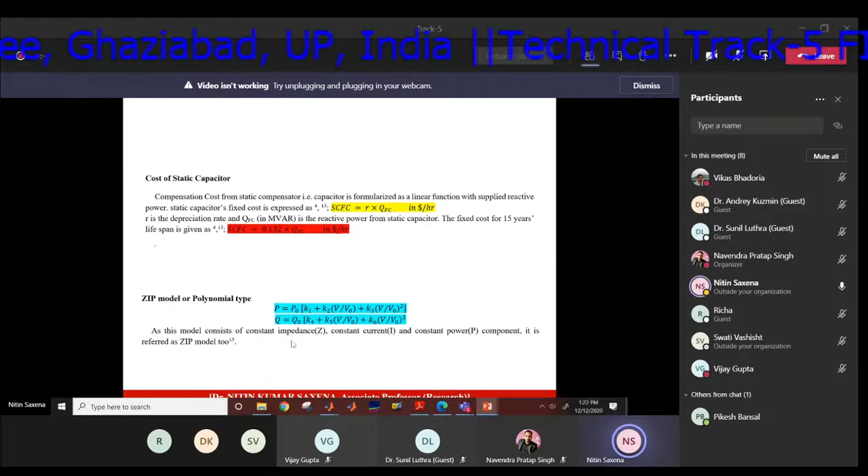As we know, loads may be classified in different categories, and one of the most commonly used methods is the ZIP model. Mathematically, the ZIP model is represented by these blue highlighted equations for real power as well as reactive power. By putting different values of K1, K2, K3, and similarly K4, K5, K6, we can get different classifications of our load model.

Though the polynomial is not so popular, for a realistic approach, if we use the exponential method type of load, it may give a more realistic picture about our load.

So if we put our load in the exponential form as given here, and change the exponential component by putting different values of NP and NQ, we can get different classifications of the load. For this purpose, I used five kinds of load components: the air conditioner, resistance heater, lighting, pump, and large industrial motor. For these, I got the values of NP and NQ from literature.

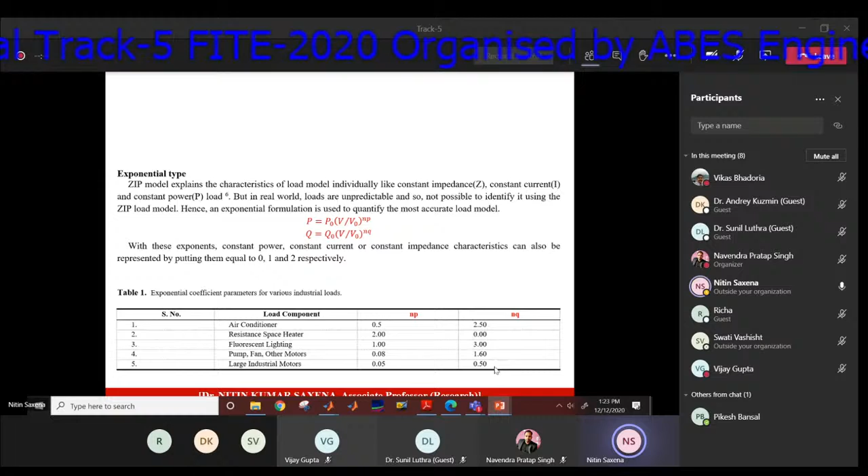However, if we put the value of NP and NQ as 0, 1, 2, then we can again get values like constant Z, I, or P kind of model.

This is the simple model which I use to get the reactive power for our system, in which I use an induction machine. Since I want to use it as a generator, I calculated the torque required for this machine and gave a negative value of torque by which this machine works as a generator. For this, I'm putting a load from the Simulink model, three-phase dynamic load.

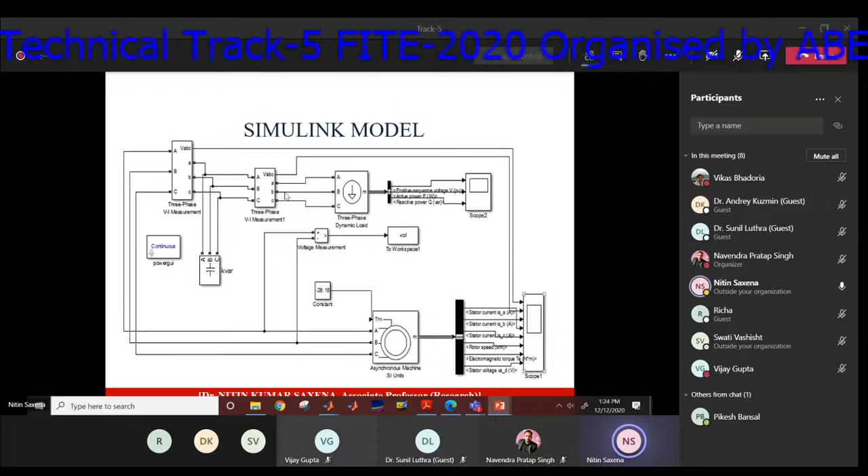There is an option for changing the value of NP and NQ. When I change these values, it will behave like different loads as per our requirement for this paper. This is the capacitor bank, so we can give different reactive power, and the system will work. So how do we proceed?

For proceeding, I used a machine of 4 kilowatt, 400 volt, 50 hertz squirrel cage machine, and I operated it at 4% negative slip so that it can work as a generator.

First of all, I put an iterative M-code MATLAB program, through which I tried to get the torque for which this machine will work at exactly 4% negative slip, along with reactive power estimation. This I calculated for different classifications of the load.

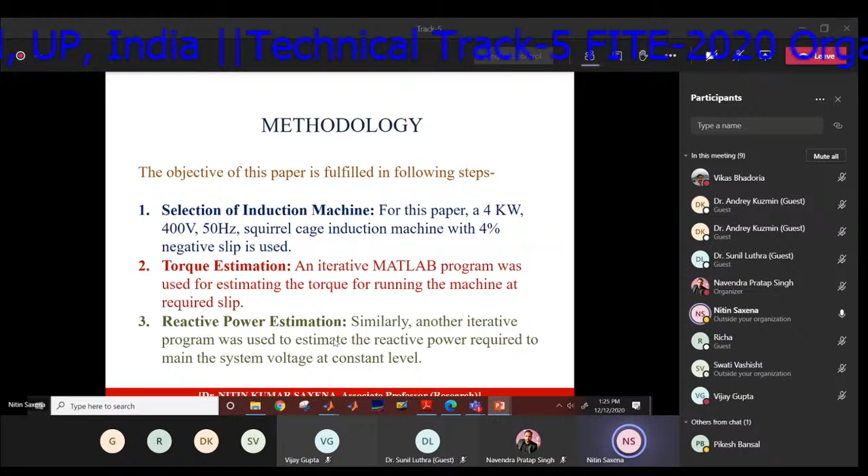So for different loads, the reactive power estimation will be different. From my MATLAB programming, I received different values of reactive power according to the load.

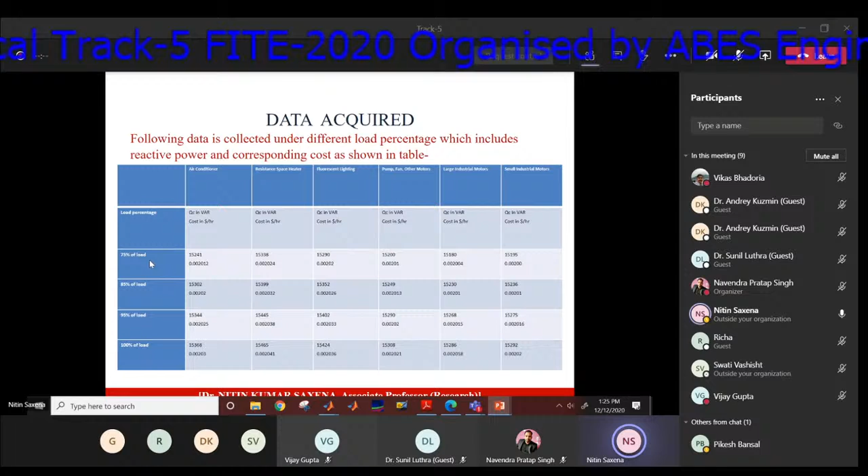For getting different results, I put some mathematics here: when we put the load at 75%, 85%, 95%, or 100%, with different kinds of loads like air conditioner and so on, I got the value of reactive power in each case. Once I got the reactive power, I also mathematically calculated the reactive power cost.

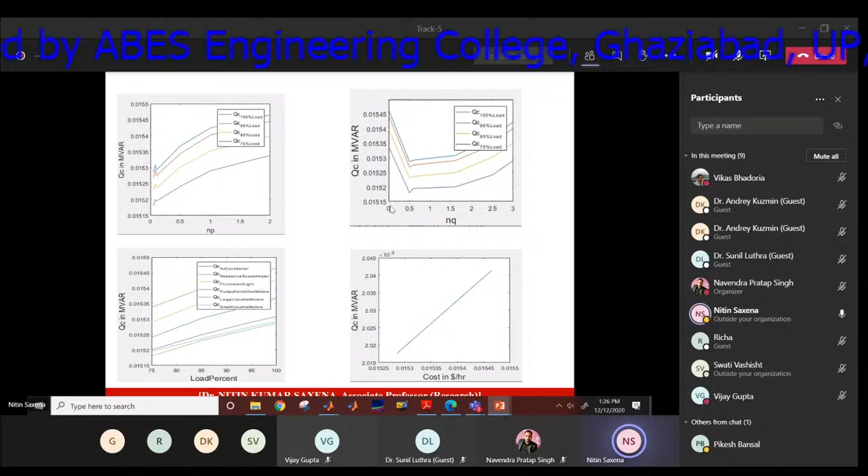This is the graph with values calculated using the MATLAB coding mentioned in the methodology. I tried to get these plots, and from these graphs we can conclude how the reactive power requirement is changing for different loads.

So we can conclude that estimation of reactive power for excitation of self-excited induction generator, or squirrel cage induction generator, has been done using the exponential load model for different types of commercial loads, along with the calculation of cost in each case.

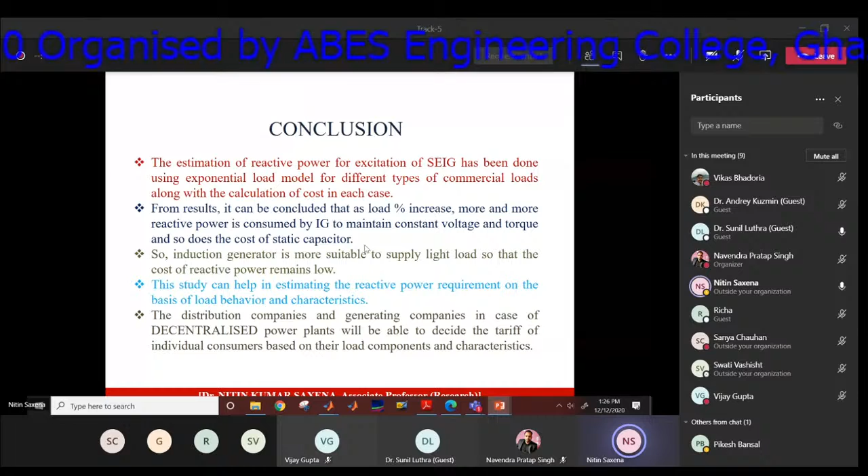From these results, it can also be concluded that as the load percentage increases, more reactive power is consumed by the induction generator to maintain constant voltage and torque, and so does the cost of the static capacitor. So the induction generator is more suitable to supply light load so that the cost of reactive power remains low.

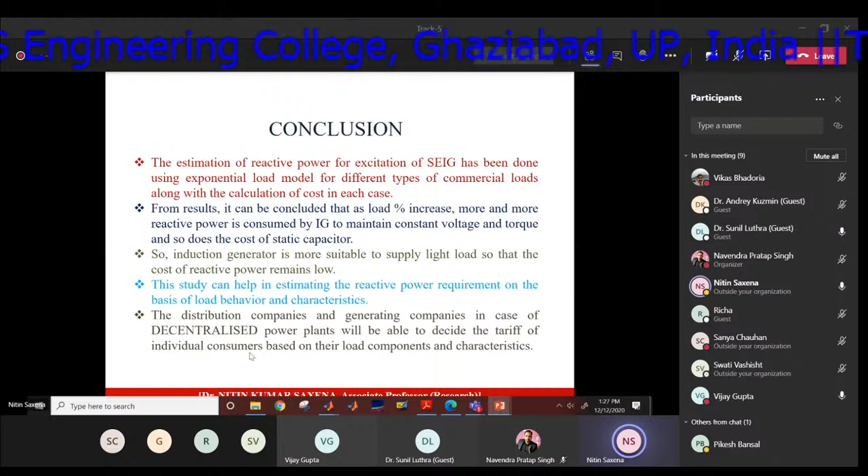This study can help in estimating the reactive power requirement on the basis of load behavior and characteristics. Distribution companies and generating companies, in case of decentralized power plants, will be able to decide the tariff of individual consumers based on their load components and characteristics.

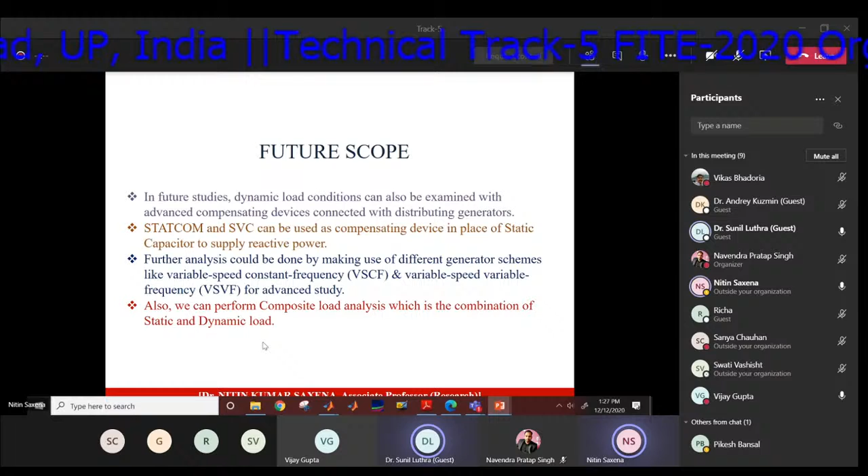In future studies, dynamic load conditions can also be examined with advanced compensating devices connected with distributing generators. STATCOM and SVC can be used as compensating devices in place of a static capacitor to supply reactive power. Further analysis could be done using different generator schemes like VSCF or VSVF for advanced studies. We can also perform composite load analysis, combining static and dynamic loads.

Thank you very much. This is all about the presentation on my topic.

Okay, that's great, Professor Nitin.

Nitin, I have two queries. First, whenever we do research, there is always comparison with previous research. Someone did that work, and we performed ours. From that, we can conclude whether our research is somewhat better, differentiating, or similar. Have you made any comparison with previous results?

Actually sir, in this model I tried to get the iterative procedure for getting the reactive power requirement on the basis of the load. So if I talk about this particular paper, I didn't compare with previous studies. However, I have done that part in my other papers, sir. I have already extended it in that direction for the journal, but in this paper I am not quoting that part. I understand that further extension is always required before sending to journals.

And secondly, I just want to check—there are always some implications of research. Whatever you do, there are always some implications, and that was missing in your presentation. Can you explain?

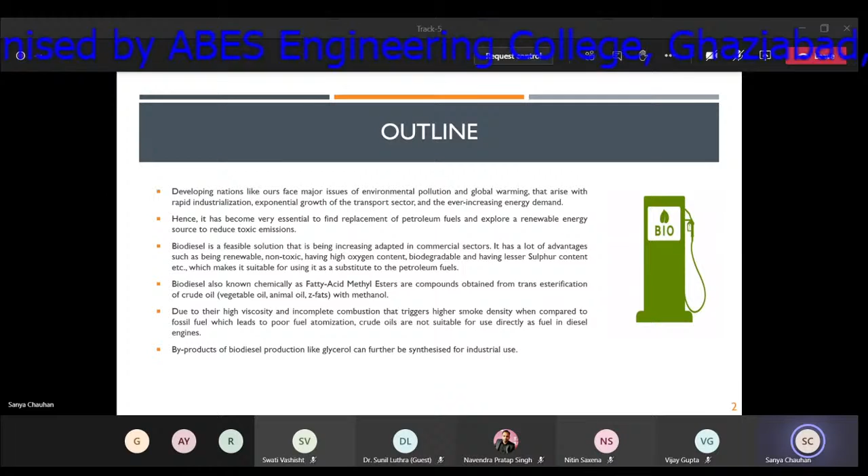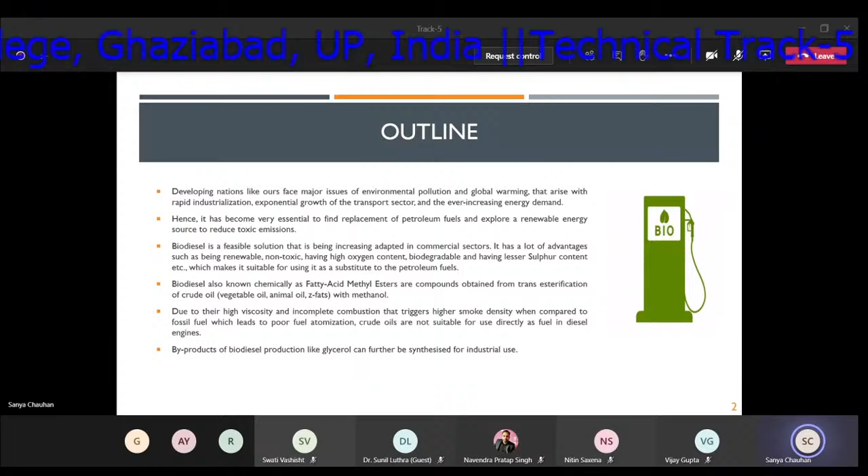Biodiesels, also chemically known as fatty acid methyl esters, are produced by chemically combining any natural oil or fat with methanol or ethanol by transesterification. Due to high viscosity and incomplete combustion that triggers higher smoke density compared to fossil fuels, leading to poor fuel atomization, crude oils are not suitable for direct use in diesel engines. Hence transesterification, thereby reducing viscosity, is necessary. The byproducts of biodiesel production, like glycerol, find extensive use in industrial applications.

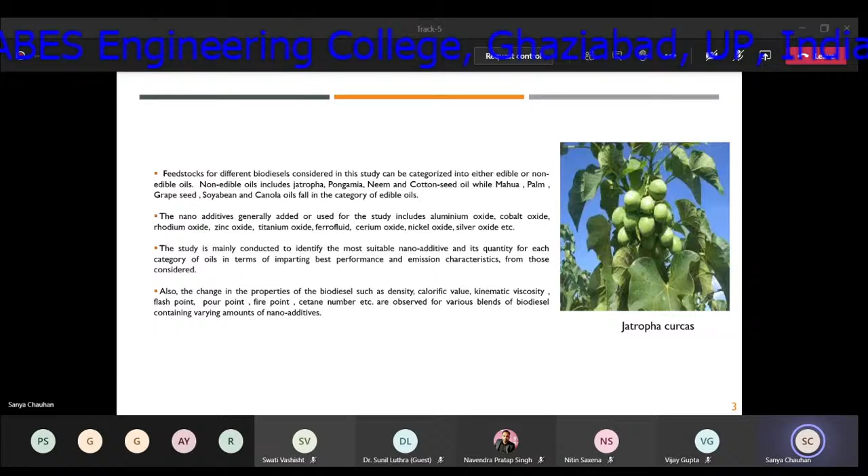The feedstocks for various biodiesels can be classified as either edible or non-edible oils. In these studies, oils from both categories have been considered. There have been nine oils that we considered for this.

Metal-based nano additives are generally added for fuel performance enhancement, and some of those considered in this study are aluminium oxide, cobalt oxide, etc. The aim of the study is mainly to identify the most suitable nano additive from those considered, and its quantity for each category of oil, in terms of imparting the best performance and emission characteristics, for further studies to be aimed in this direction for commercial production.

Also, the change of properties in the biodiesel, such as density, calorific value, kinematic viscosity, and so on, are observed for various blends of biodiesels containing varying amounts of nano additives to account for their practical feasibility. This being a literature review article, about 30 papers have been reviewed, but due to format constraints I wasn't able to include all of them.

So what we see here is one nanoadditive for each oil that gave the best outcomes. It can be observed that most of these follow a similar trend, wherein both performance and emission characteristics are improved, with some exceptions.

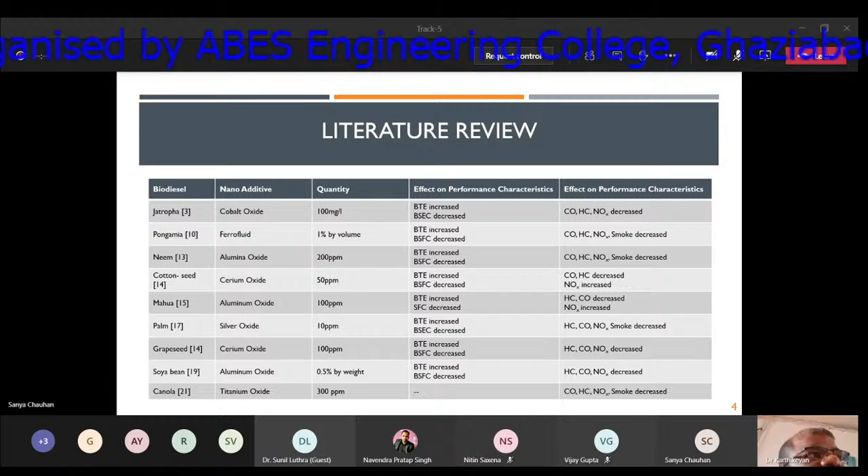Sir, is it audible? Hello? Yes, Dr. Karthikeyan, thank you. Sorry for the delay, sir. It's okay, Miss Sanya Chauhan is just presenting the paper, it is just the second paper of this track. Should we go ahead, sir? From the middle, track 5. Just now I received the message that you can join in track 5. Yes sir, this is track 5, and this is paper number 2 in this track, being presented by Miss Sanya. Should we go ahead, sir? Yes, go ahead. And how many papers are now available? Sir, there are a total of 9 papers to be presented in this track, this is the second one, sir. Okay wait, sir. Okay Miss Sanya, you may go ahead, ma'am.

So as I said, it can be observed that most of these follow a similar trend, wherein performance and emission characteristics were improved. Percentage changes of which have been given on the next slide.

For Jatropha oil, we considered aluminium CNT, cobalt oxide, aluminium oxide, cerium oxide, and graphene oxide nanoadditives. For this biodiesel, cobalt oxide at 100 mg per liter concentration gave the best output. Decreases in various emission and performance characteristics have been observed, like about 2.1% in brake specific energy consumption, and 0.6% in BTE at full load conditions.

1% by volume ferrofluid gave the best output for Pongamia biodiesel, though cerium oxide additives too imparted enhanced thermal efficiency; due to reduced emission characteristics, the decision was made otherwise. Similarly, for neem biodiesel, aluminium oxide was considered. For cottonseed, cerium oxide; aluminium oxide yet again for Mahua biodiesel. For Mahua oil biodiesel with aluminium oxide, though hydrocarbon and CO emissions decreased, a 7.95% increase in NOx emissions was observed.

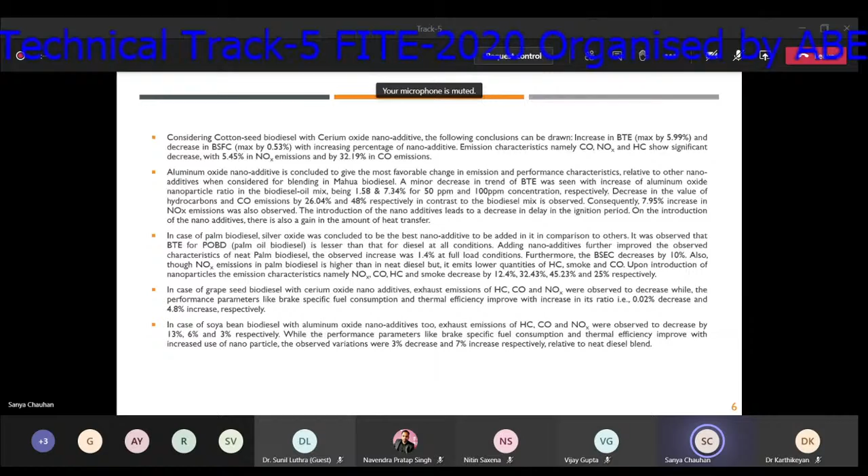For palm oil biodiesel, silver oxide was concluded to be the best. Cerium oxide for grapeseed, and aluminium oxide yet again for soybean biodiesel.

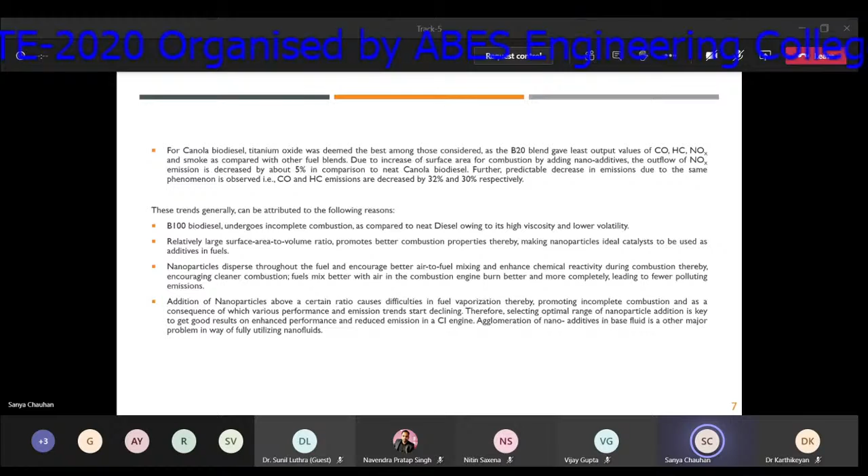The general trends observed can be attributed to some given reasons. Higher viscosity and lower volatility of biodiesel causes it to undergo incomplete combustion, hence performance of the fuel is lower than that of neat diesel. Nanoparticles provide a relatively larger surface area to volume ratio, hence promoting better combustion properties, making them ideal catalysts to be used as additives in fuel. Another reason for the observed trends is that nanoparticles disperse throughout the fuel and encourage a better homogeneous air to fuel mixture.

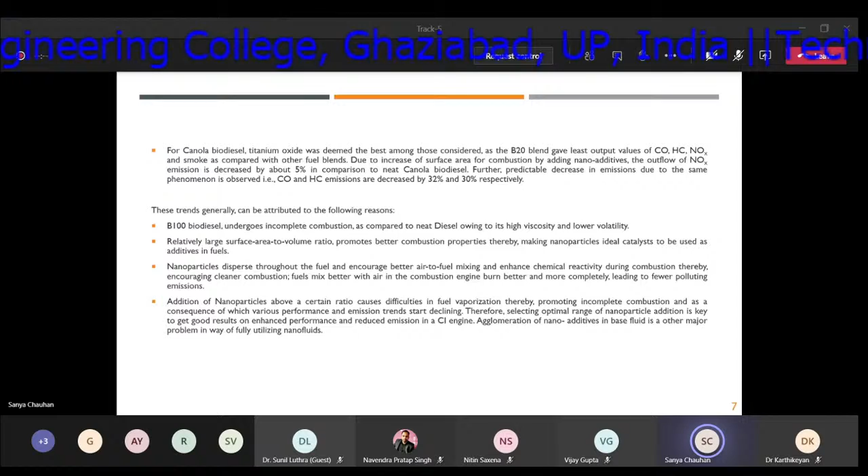Some of the exceptions that can occur, like we observed in the NOx emissions for Mahua biodiesel with aluminium oxide, are because addition of nanoparticles above a certain ratio causes difficulties in fuel vaporization, thereby promoting incomplete combustion. As a consequence, various performance and emission parameters start declining. Therefore, selecting an optimal range for nano additives is key to getting good results. Agglomeration, the clogging of nano additives in base fluid, is yet another major problem in fully utilizing nano additives commercially.

In conclusion, based on the available literature of said oils, B20 blend of Pongamia oil biodiesel blended with 1% by volume ferrofluid gave the most favorable trends in performance and emission characteristics. Further studies can be focused on this combination, to obtain an optimum ratio of nano additive to be blended with the biodiesel, or by varying the compression ratio, etc., to obtain enhanced results.

Some other factors for drawing this conclusion, and to consider Pongamia oil biodiesel as a possible additive to diesel for commercial use, is because Pongamia is a non-edible oil, and the production of biodiesel from edible oils, while a good option, is not commercially feasible. The residual of Pongamia biodiesel production, like the tree barks and leaves, finds widespread use for medicinal purposes.

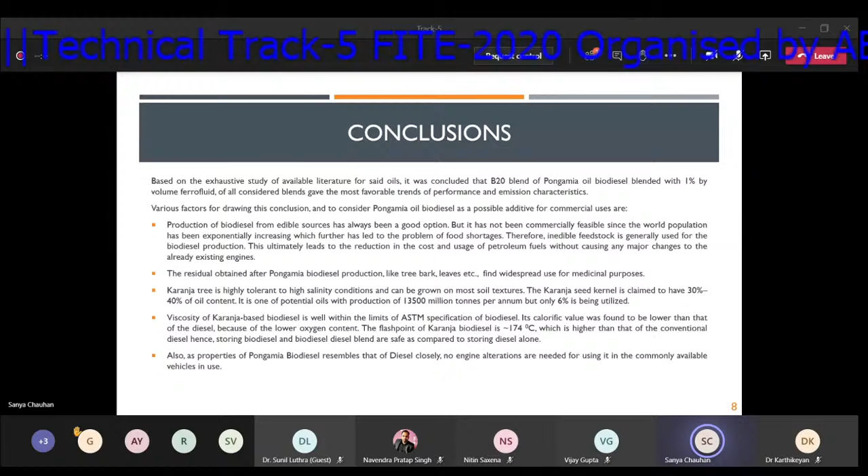That is all, I guess.

Query from Dr. Andrey Kuzmin. Yes, Dr. Andrey, please ask. Yes, I have a question. Could you please tell me what is the error level of your measurement tools and the overall error level of the system? Sorry, I wasn't able to comprehend.

Okay, I have to repeat it. Yes, sir, sorry, I wasn't able to present the question. Do you have any values of the systematic error of your measurement systems? So this is a review paper and not a research paper, so I don't have the error calculations.

This question is concerned with one of your slides where you show that some parameters change very little, around 2%, 5%, 0.6% increase in BTE. But this is a very, very low change, and the measurement tool must be very accurate to capture this. So these values have been taken from other research papers that have been published. Okay, I see. Thank you.

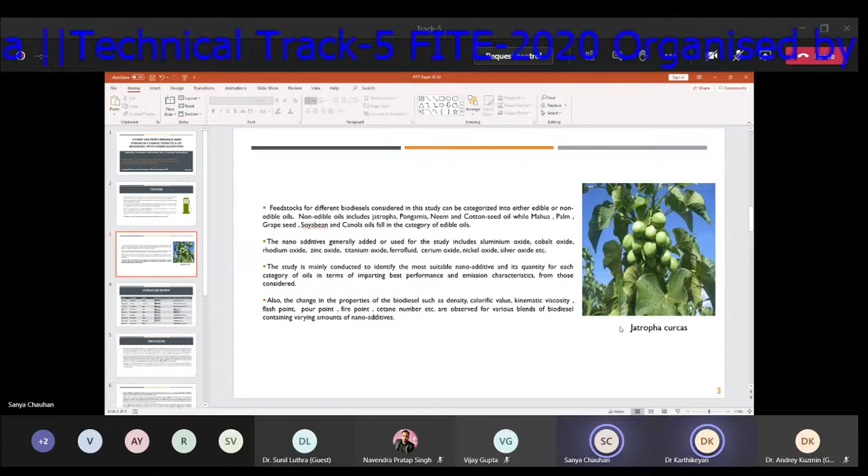Sir, I'm not able to hear you. What? Hello. Hello. Hello, yes sir. Yes. Okay. Hello. Hello, please tell me.

Hello. Yes, sir. Yes, madam. Please tell me why you are taking this now.

The biofuel 4th generation is going on, but you have taken only the 2nd generation. It is an old work now. And what are the nano additives you have taken?

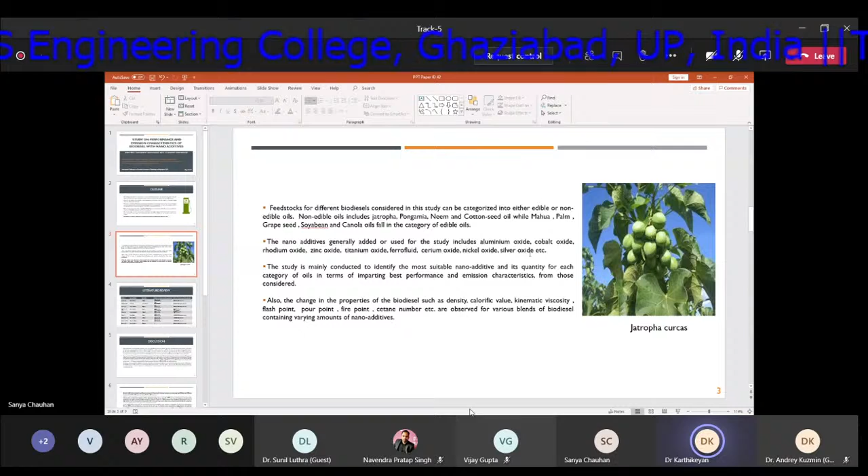So the nano additives, the aluminum oxide, cobalt oxide, basically metal-based nano additives have been used, material based. What is the combustion temperature of the nano additives? Do you know that? Is it after combustion, a complete combustion, or will it maintain inside the combustion chamber? So I guess it's released with the exhaust gases.

No. Try to understand my question. You should know before using nano additives, first we should know the combustion temperature of the nano additives. Because after compression, the combustion temperature is around 1600 degrees centigrade. But our selection of nanoparticle combustion temperature should be less than 1600. Only then it will make complete combustion inside the combustion chamber. Otherwise it is not possible, it will clog everything, nozzle and flow pipe and everything.

Have you found that value of the combustion temperature of the nano additives or not? So this is just a review paper, we've not taken a considered review of that. Okay. Are you a research scholar or ME, Master of Engineering?

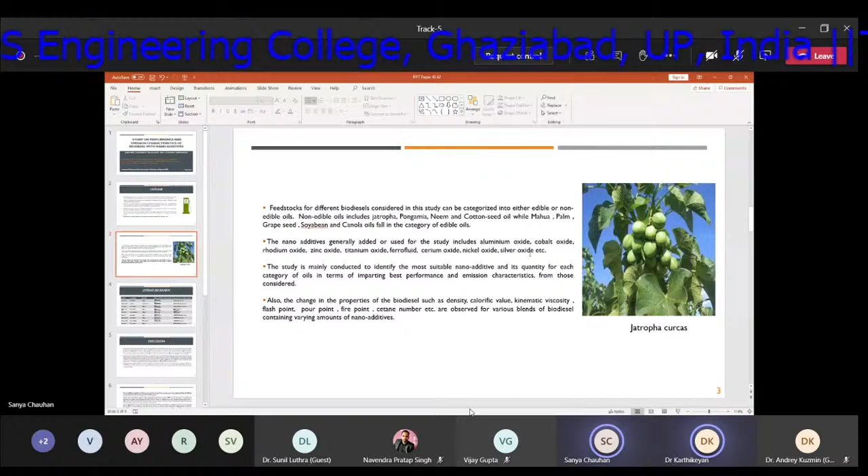It's with BTech students. What BTech? BTech student. Yes sir. Okay, better. I have nearly published around 70 SCI papers in the biofuel area and engine testing. My name is Karthikeyan, you can go through the Google citations and refer more papers.

Do you want any doubt regarding your project? You can contact me, I will help you, don't worry. Okay sir, sure sir, thank you. Don't do that old one.

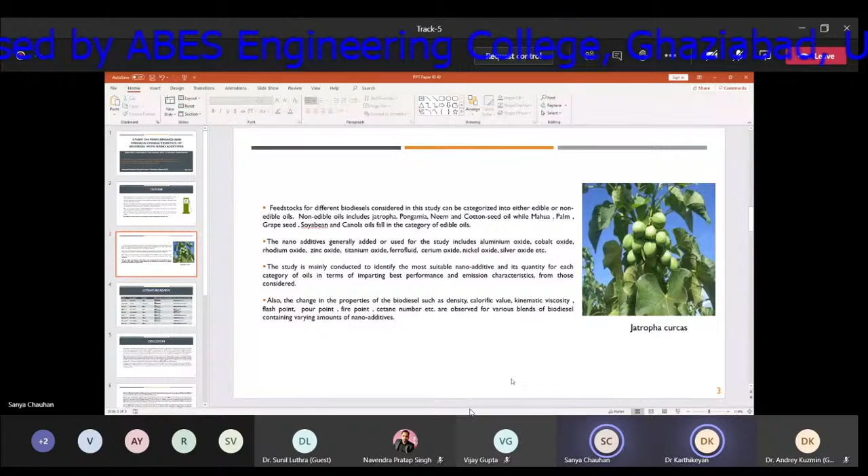You have taken an old one, but now all energy conversion is going towards electric vehicles. It's okay to focus on biofuel, but it should be the latest trend. The most recent trend in biofuel is algae, so algae biofuel is the latest trend going on. If you are doing this project in biofuel, you can take it as third generation, which is better. Third generation means algae, algae means you have to focus only on microalgae.

Okay, but anyway, all the best. Okay, carry on, okay.

Dr. Sanya, I have one query. Whenever we do a literature review, there will always be some review criteria. What was the review criteria? Sorry, what review criteria? For example, what were the keywords? What databases did you search? Just what was your criteria for reviewing these papers? Why only these 25 or 27 papers?

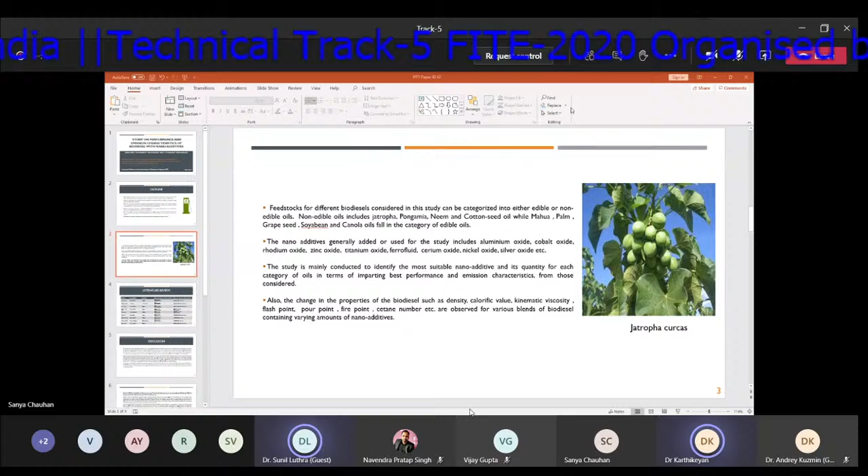Dr. Karthikeyan, please mute your mic. Yes, just muted me, so you can reply. So...

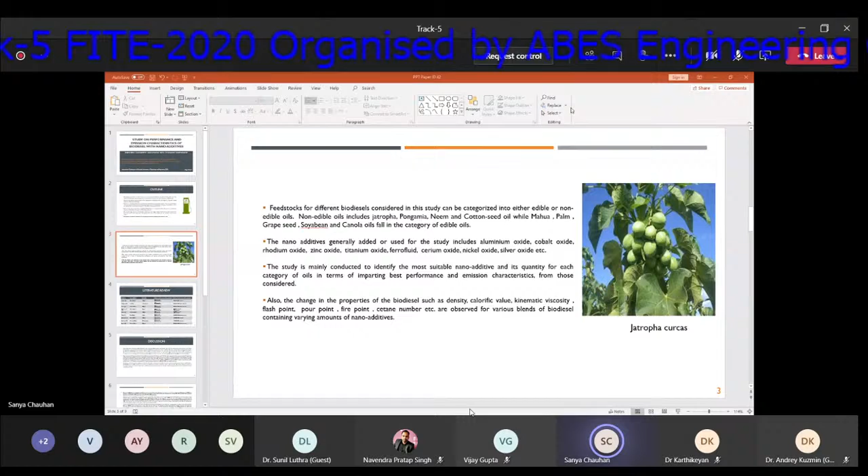We've used the generally used biodiesels that have been studied upon, that are mostly studied upon, and as I said, metal-based nano additives, whatever nano additives we were able to get. Okay, thank you, thank you.

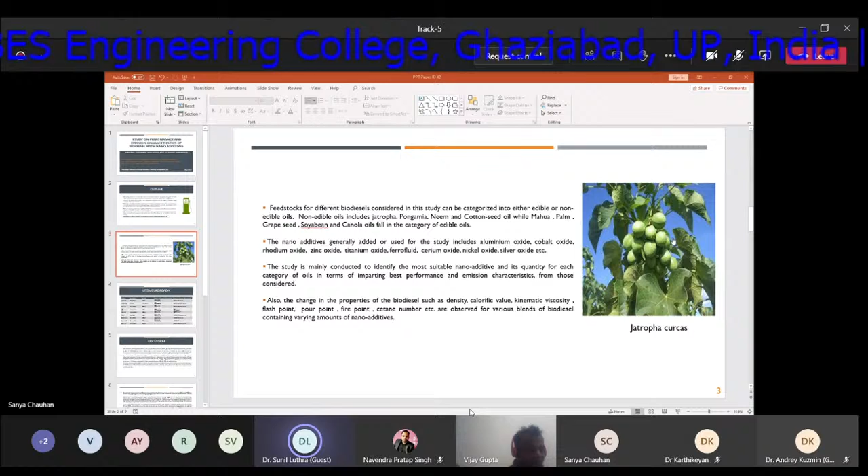Before we proceed for our next presentation, I would like to introduce our co-session chair, Professor Dr. S. Karthikeyan. Dr. Karthikeyan is working as a professor and head of the department of Mechanical Engineering at Syed Ammal Engineering College, Tamil Nadu. He completed his PhD in Mechanical Engineering in 2015, ME in Thermal Engineering in 2007, and BE in Mechanical Engineering in 1995. His area of specialization includes thermal engineering, solar power technology, internal combustion engine, and biofuels.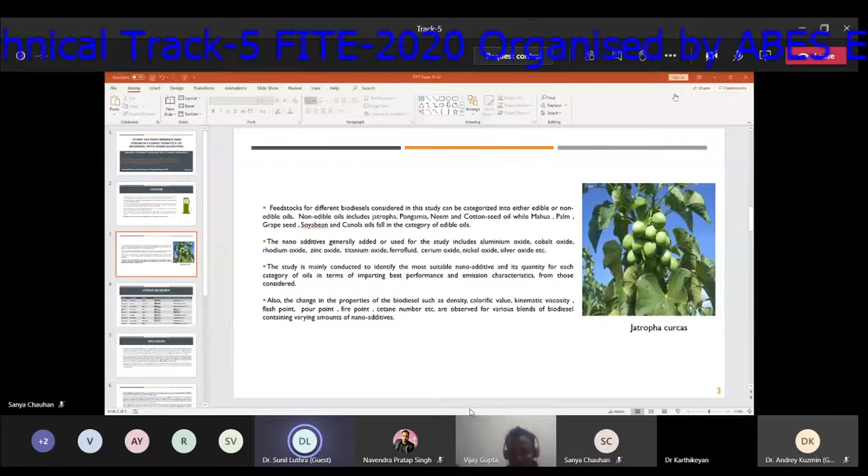Miss Payal Sharma. Okay sir, okay sir, yes sir, I'm sharing. Sir, is it visible? Yes ma'am, it is visible. Just make it presentation mode. Okay, am I audible? Yes ma'am, you are audible.

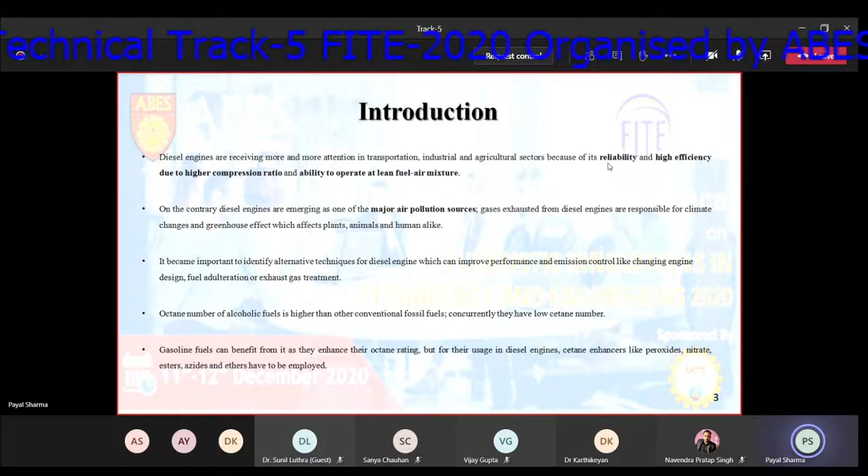So the basic introduction is that, as we all know, diesel engines are a major air pollution source, producing emissions responsible for climatic changes. We need to focus on reducing emissions and increasing performance. Nowadays, many researchers are focusing their work on alternative fuels, as well as on adding nano additives and alcoholic blends or biodiesel blends with diesel to improve performance and reduce emissions.

So I have focused my review on the alcoholic additives that are being used for diesel to reduce emission as well as to improve performance.

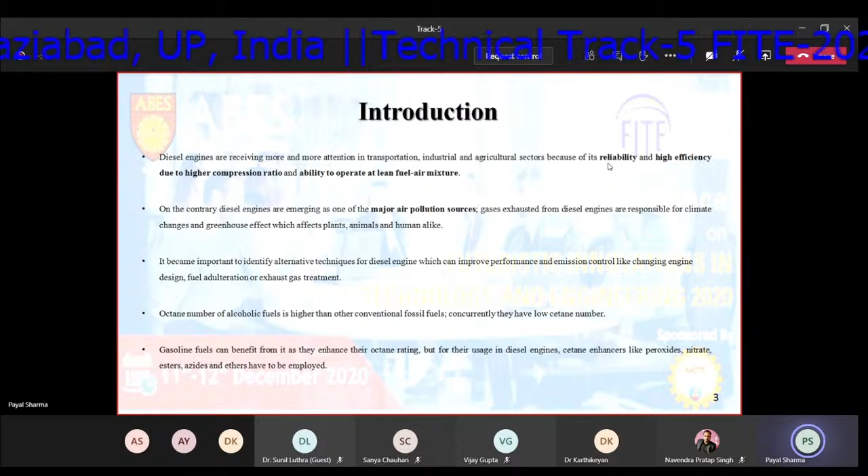Through my research, I've seen that alcoholic fuels have a high octane number but a low cetane number. For gasoline fuels this is good because it enhances the octane rating, but for diesel fuels it reduces the cetane rating. So we have to use cetane enhancers with diesel like peroxides, nitrates, esters, azides, and ethers.

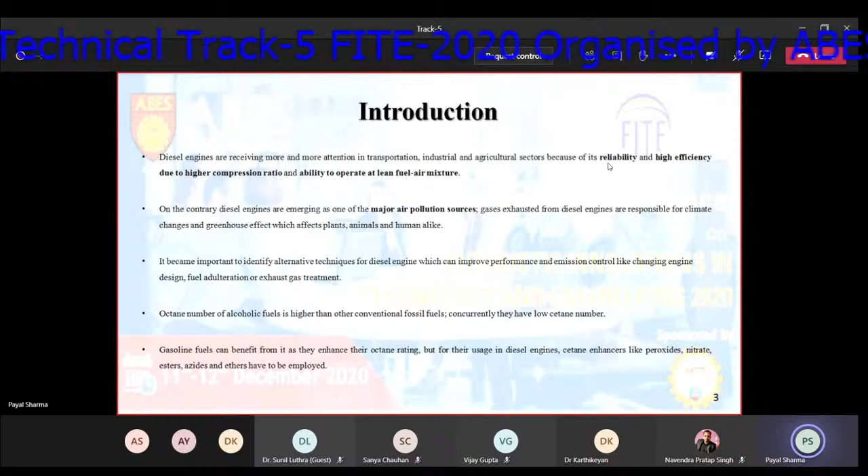If we use cetane enhancers along with alcoholic fuels, these cetane enhancers also produce some effects on emissions. So basically it has to be a compromise of how much to be added.

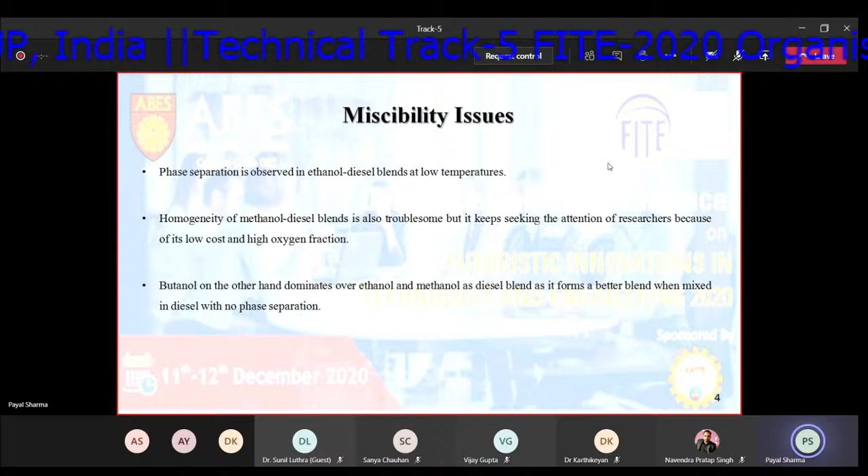Miscibility issues usually come when we add alcoholic additives with diesel, like phase separation observed with primary alcohols. When we blend ethanol or methanol with diesel at low temperature, we usually observe phase separation. Homogeneity is also an issue, so it's troublesome, and we have to look for what else can be added to improve the homogeneity of ethanol and methanol with diesel blends, that is with primary alcohols.

However, among all the alcohols, butanol has some superior properties. It dominates over ethanol and methanol as a diesel blend because it forms a better blend even at low temperatures, and no phase separation is observed.

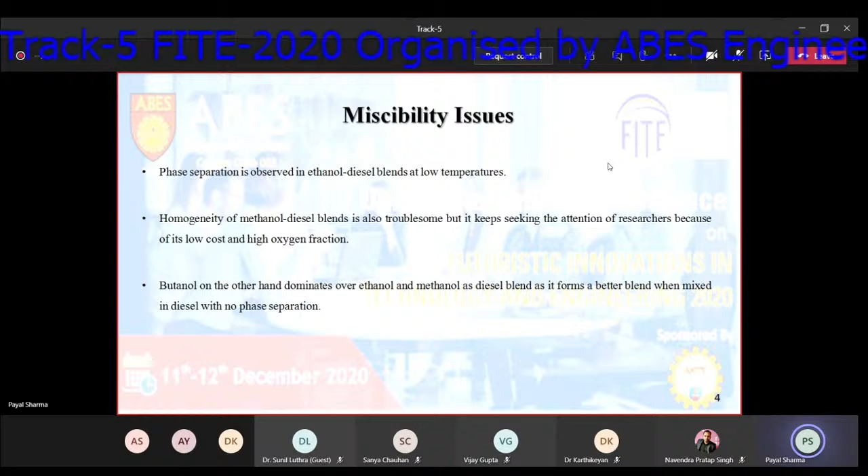The cetane number basically is a specification that indicates the self-ignitability of the fuel, and the cetane number of butanol is high compared to the primary alcohols. The cetane number of primary alcohols is already low, and although butanol also decreases the cetane number of the diesel blend, amongst the primary alcohols, the cetane number of butanol is high.

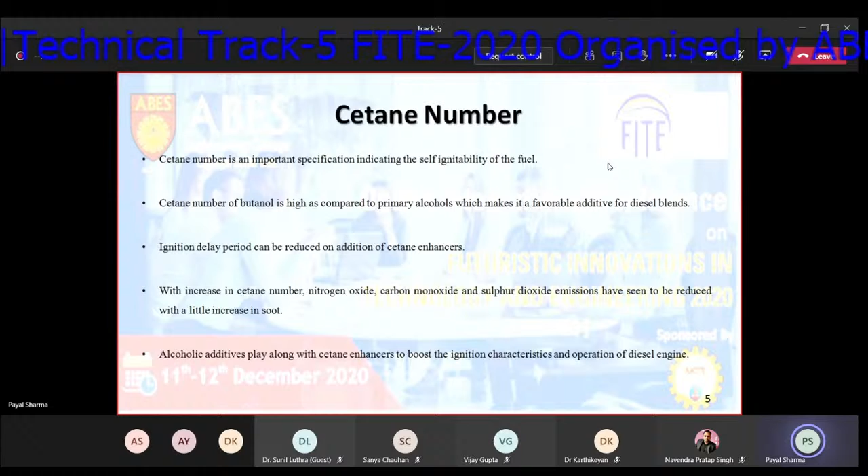So amongst all the alcohols, butanol is a better additive option for diesel because no phase separation occurs even at low temperatures, and the cetane number is also high compared to the primary alcohols. Although the ignition delay period can be reduced with the addition of cetane enhancers, we have to add a cetane enhancer when we add alcohol to diesel.

That is because cetane number will be reduced, so we have to add the cetane enhancer. Cetane enhancer also reduces the ignition delay period, so it helps in that. As we keep increasing the cetane number, the NOx, carbon monoxide, and sulfur dioxide emissions are seen to be reduced, with a little increase in soot though.

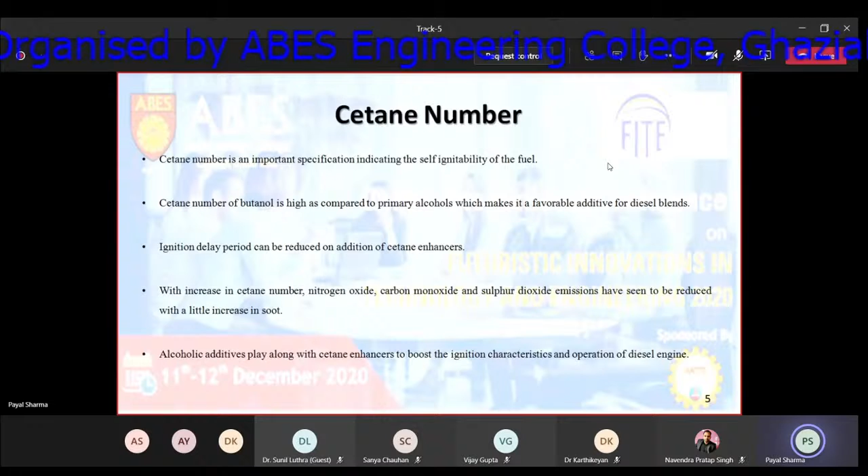So alcoholic additives basically play along with the cetane enhancers so as to boost the ignition characteristics. If we need to add alcoholic additive with diesel, we have to add cetane enhancers, although butanol has superior property amongst all the alcohols. But even then, if we need to add alcohol with diesel blend, we have to add cetane enhancer.

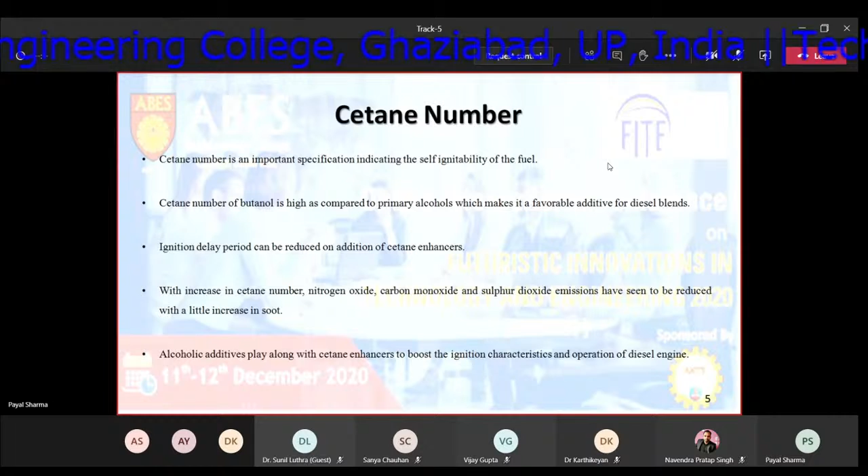There is limited solubility in diesel, but we can improve those blends by adding certain additives, emulsifiers, or cetane enhancers. Higher alcohols have better solubility with diesel compared to primary alcohols, and they also form stable blends at low temperature, whereas methanol and ethanol cannot form stable blends at low temperature, even though we can improve that by adding certain emulsifiers.

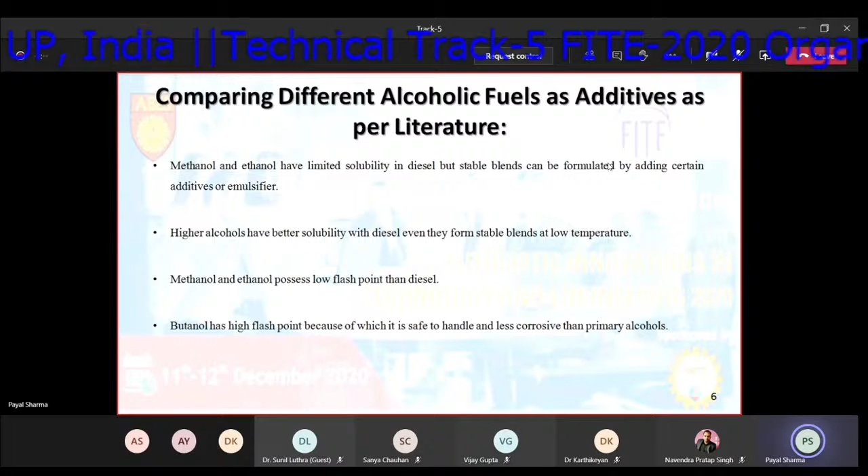Methanol and ethanol possess low flash point also compared to diesel, which is a barrier in terms of safety. Butanol has a high flash point amongst the primary alcohols, for which it is safe to handle, and it is also less corrosive than the primary alcohols.

That is why, when I went through many research papers, I've seen that many researchers have used butanol with diesel, and many have also used methanol and ethanol, but then they have used some cetane enhancer or some emulsifier or additive with it.

So I've summarized all the alcoholic fuels like primary and a few secondary ones like higher alcohols. I've been through papers and seen what can be the barrier if we are using alcohol like methanol and ethanol. So I've summarized it in a table.

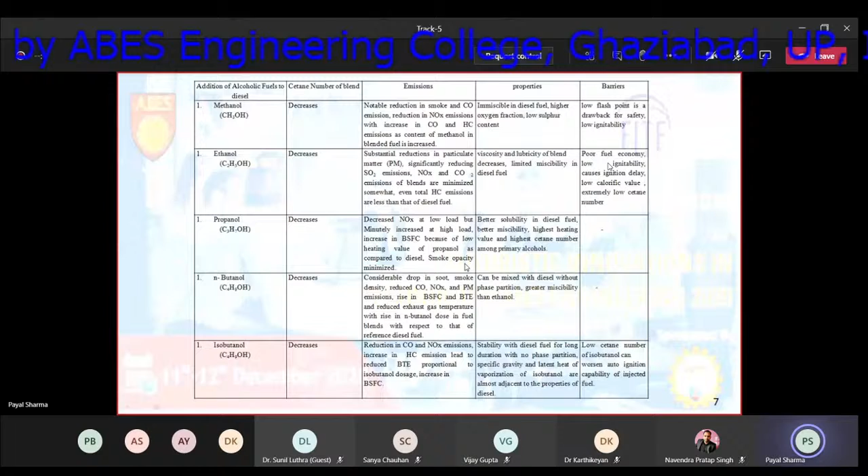Basically, the cetane number of alcoholic fuels is low, so when added to diesel fuel, the cetane number always decreases. I've seen that adding alcoholic additive to diesel always decreases its cetane number, so for that we are adding the cetane enhancer.

As per the emissions, there is a difference: when we add methanol, it gives reduction in smoke and carbon monoxide emission and reduction in NOx emission, but a little bit increase in carbon monoxide and HC emissions. Similarly, with ethanol, we see reductions in particulate matter and sulfur oxide emissions, also NOx and CO emissions were minimized, but total HC emissions were less than that of diesel fuel. So every alcoholic additive has some different effect on emission.

Whereas for the properties also, methanol and ethanol, as we discussed, are immiscible in diesel fuel, so solubility issues are always there with methanol and ethanol. The barriers for using methanol and ethanol are, first of all, low flash point, which is a drawback for safety, poor fuel economy, low ignitability, and low calorific value.

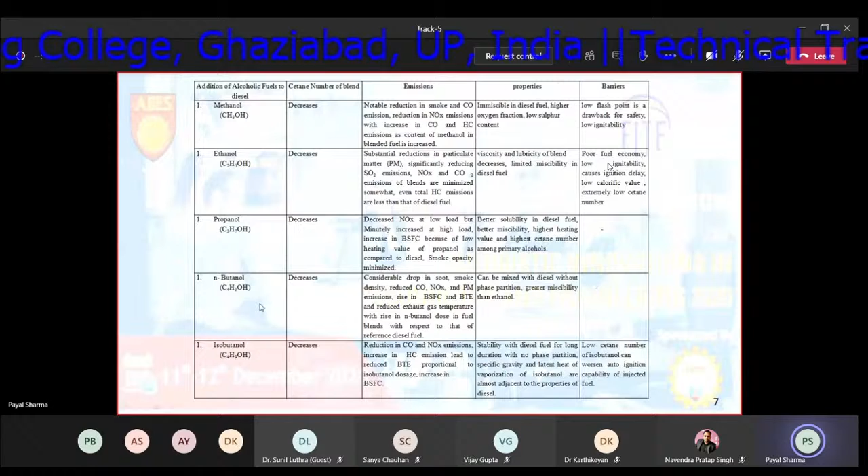With butanol and propanol, I have found limited issues coming up, and even the issues that were coming up are being resolved, so very few barriers for propanol and butanol were there. But for isobutanol, it has low cetane number, so it can worsen the auto ignition capability of the fuel. Reductions were found in every case, but in some cases soot was exceeding. So this is how I have summarized it in a table.

Sorry, my slide is not good. Okay, so what can be the solution for the miscibility issues? I've gone through alcoholic fuel additive papers.

The solution can be, for primary alcohols, many researchers have used biodiesel along with ethanol when mixed in diesel. The biodiesel improves the solubility, but due to its poor cold flow characteristics, at low temperature it poses problems because it increases the viscosity. So biodiesel can be a solution to the problem of solubility of ethanol and diesel, but it also poses problems in cold weather and low temperatures.

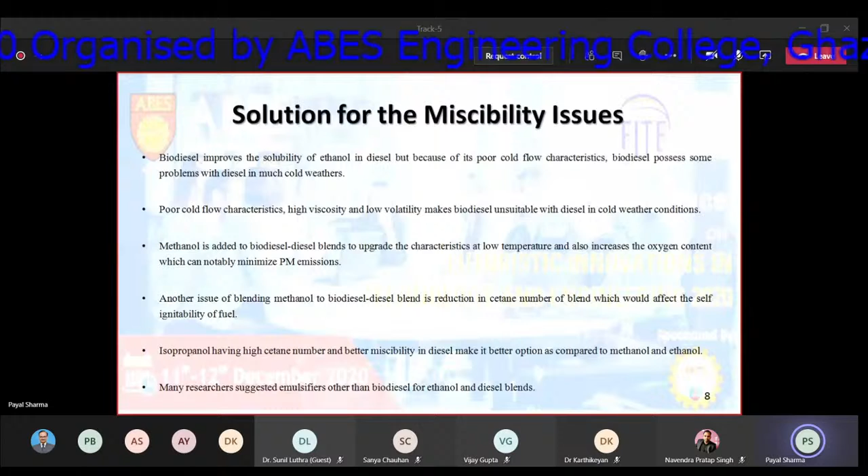Similarly, this poor cold flow characteristic, high viscosity, low volatility, makes biodiesel unsuitable with diesel in cold weather conditions. Otherwise, it's okay to improve the solubility of ethanol and diesel. Similarly, methanol can also be added to biodiesel diesel blend. It upgrades the characteristics at low temperature, increases the oxygen content, and minimizes the particulate matter emissions.

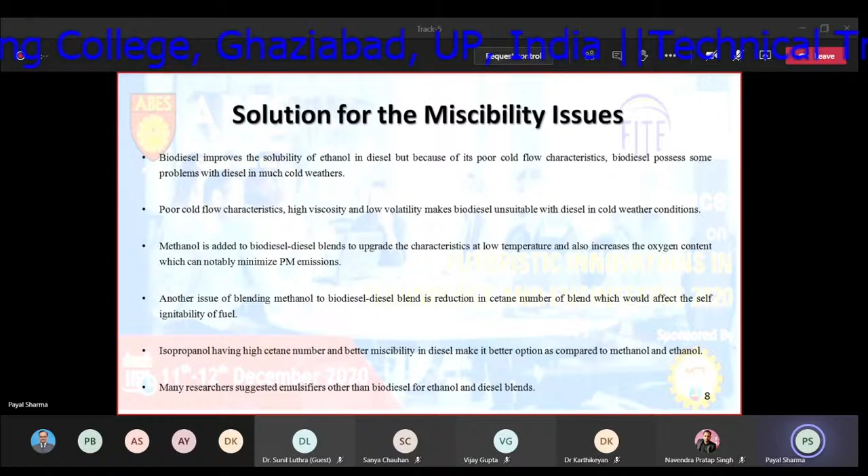Now, when we are blending methanol to biodiesel and diesel blend, it improves the characteristics at low temperature, but it reduces the cetane number of the blend, so it affects the self-ignitability of the fuel. Isopropanol has a high cetane number and, among the primary alcohols, better miscibility in diesel, making it a better option compared to methanol and ethanol.

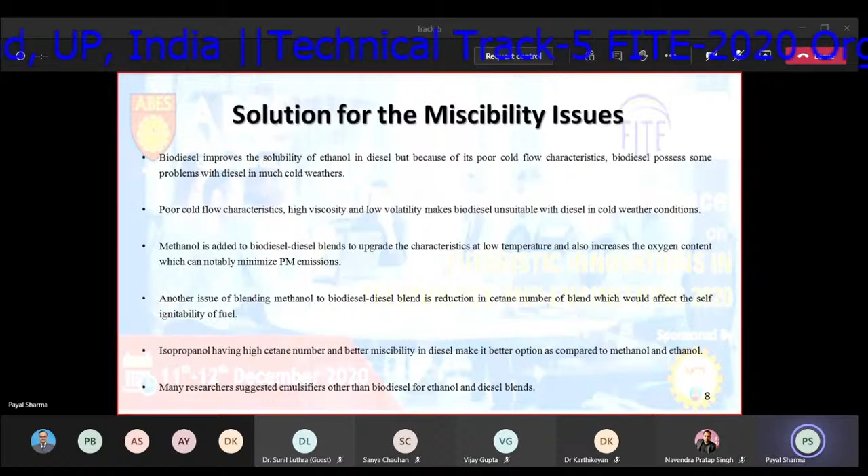Many researchers have suggested using emulsifiers also, other than biodiesel. If biodiesel poses problems at low temperature, we can use emulsifiers with ethanol and diesel blend to improve the miscibility. But there are always some issues with ethanol and methanol, the primary alcohols.

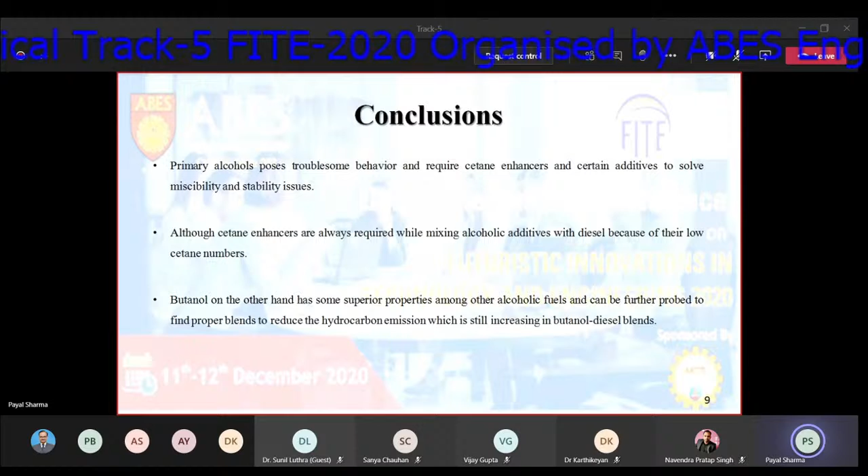So, in conclusion, primary alcohols always pose some troublesome behavior, and we need cetane enhancers to improve the miscibility issues. Cetane enhancers are always required when we mix the alcoholic additive with diesel, and they also improve the ignition delay, so they are always required. Alcoholic fuels have to work along with cetane enhancers in diesel fuel.

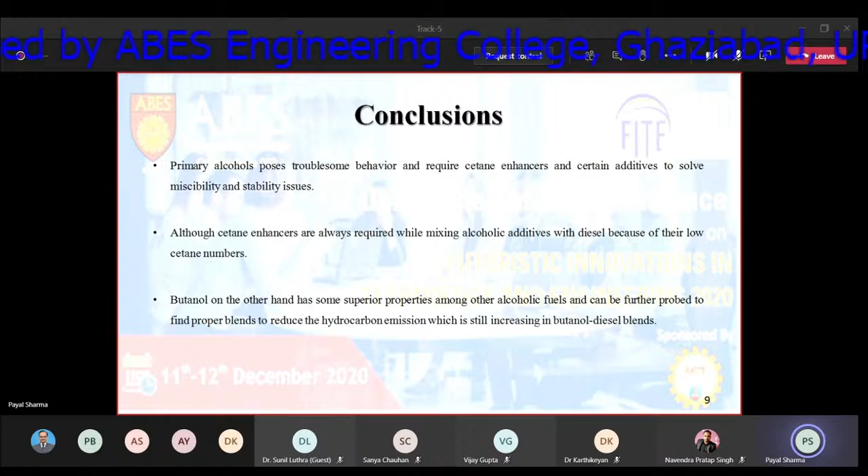Butanol, on the other hand, has superior properties amongst all the other alcoholic fuels, and it can be further probed to find what other proper blends can be formed, so that we can reduce hydrocarbon emissions, which are still increasing, because in butanol diesel blend, soot and hydrocarbon emissions are still increasing. So what other blends can we mix with butanol to improve that? We still have to probe that.

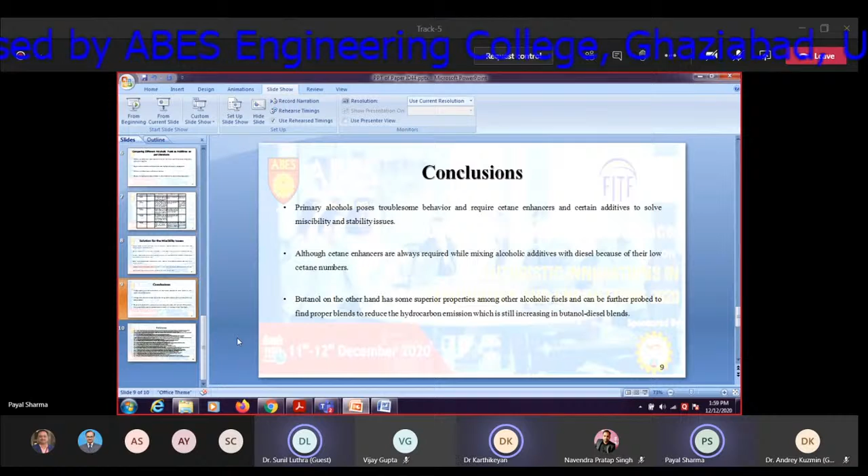Pardon, sir, there's some noise coming from somewhere. Have you selected higher order or lower order alcohols as well? Dr. Karthikeyan, too much noise is coming from your side. Hello, is it okay? No, sir, pardon, I haven't got the question. Which one did you select, madam? Higher order or lower order?

Sir, through this research, I have found that butanol has some superior properties, and if I have to choose, since this is a research review paper, I would choose butanol for a diesel blend because it already has superior properties and we don't have to improve its solubility problem with diesel. So if I had to choose, I would choose butanol. It is a review paper though.

Review paper, you are only doing the review, not work? Sir, this is a review paper. Although I'm working to find out an alcoholic blend for diesel, this is a review paper only. Okay, well then, all the best, you do your research. Thank you so much, sir.

Okay, Dr. Andrey, please ask your question. Sorry for the interruption. Okay, thank you very much. It seems Dr. Karthikeyan's voice is on the rail station, so much noise from there. Okay, I have a couple of questions, both concerning the cetane number and the emission.

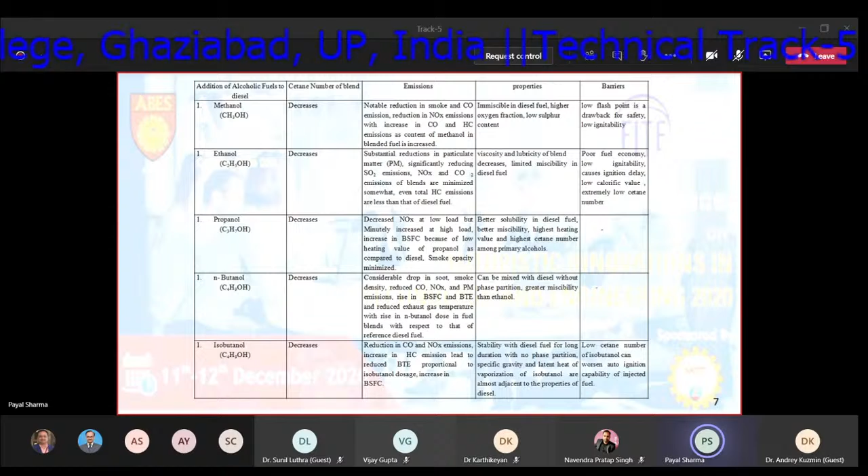That is why alcoholic fuels cannot be added alone to diesel. We always need some additives, emulsifiers, or cetane enhancers with them.

Do you have any papers with the results where the efficiency of the engine with the diesel was investigated?

Yes, sir. The research papers I've been through for this review are there, and in those papers, basically not for methanol and ethanol. With methanol and ethanol, all the researchers have found an issue that soot is somehow increasing while some emissions are decreasing at the same time. But with butanol, usually emissions are getting reduced.

Yes, but what about the efficiency of the engine, not the emissions? Do you know? Yes, sir, I'm getting there. Brake thermal efficiency was somehow increasing by 1 or 2% mostly, not much more than that. And BSFC was also increasing.

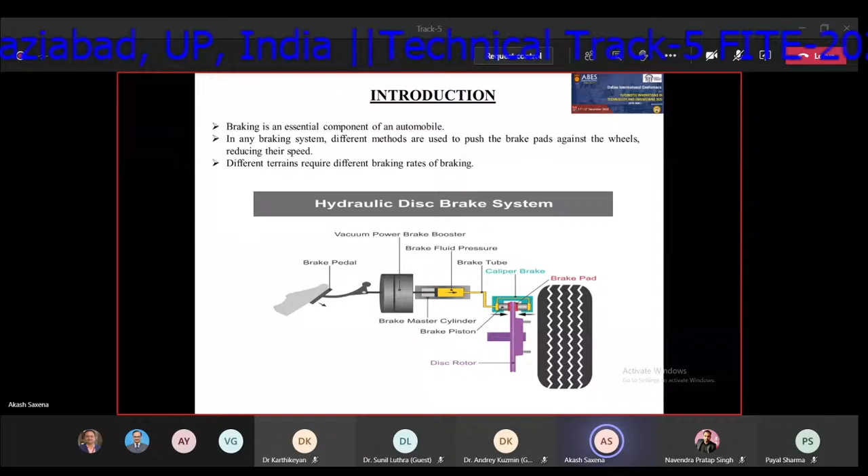When we talk about braking, two terms, brake force and rate of braking, need to be understood. Brake force is the force applied to the wheels to inhibit its motion. The rate of braking is the ratio of brake force to the weight of the vehicle. As shown in this diagram, a hydraulic braking system consists of a brake booster, a master cylinder, and drums or caliper and discs depending on its type. Here we have shown the caliper and disc. Now, if we ignore external factors for such a system, the rate of braking is almost fixed, and we have no control over it.

In our paper, we have talked about a variable brake force mechanism which can offer two different rates of braking. To understand how we did it, let's talk about the design of a variable brake force mechanism.

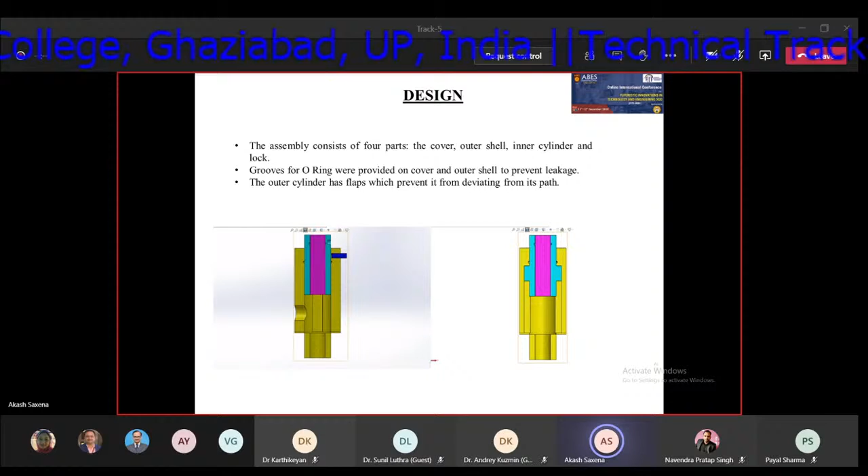The variable brake force mechanism adds a new component to the system, a force multiplier. The force multiplier works on Pascal's law. When you apply force at the inlet, it generates pressure, which is transmitted and pushes the cylinder outwards.

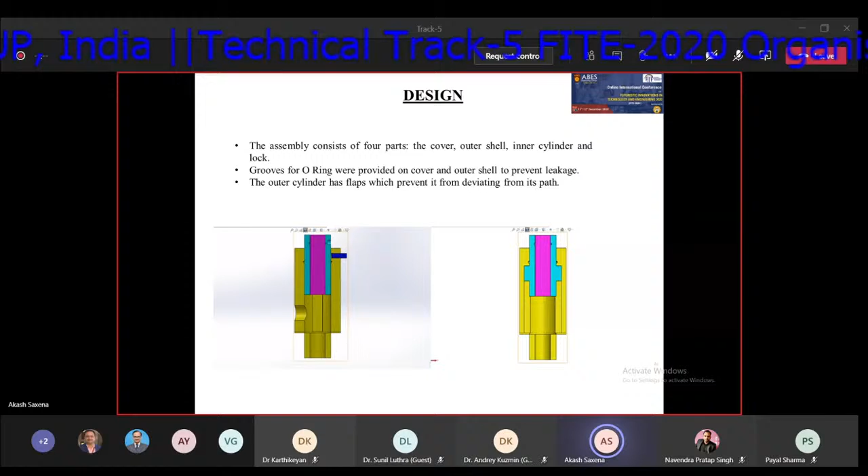It has four components: the inner cylinder, the outer cylindrical shell, the cover, and a locking mechanism. The inner cylinder can slide freely inside the shell, and the shell can slide within the cover.

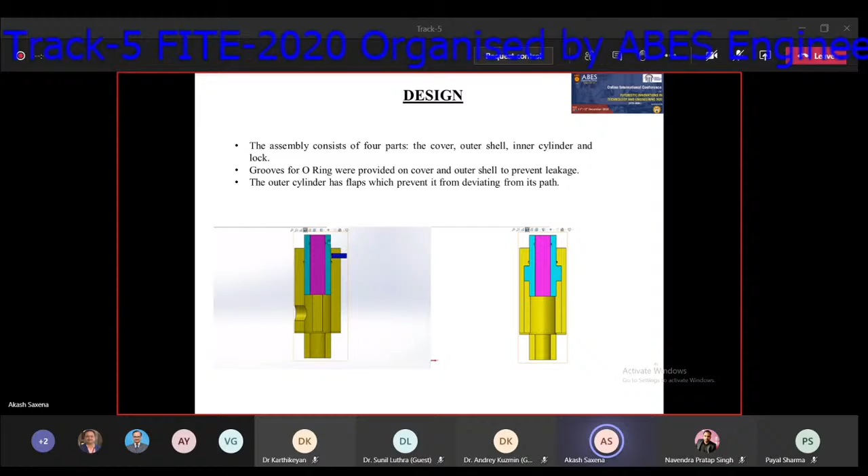There are flaps on the side of the shell which limit its travel and prevent rotation. There is a lock on the upper right corner, which locks the outer shell and prevents any movement. There are grooves on both the shell and the cover for the O-rings to prevent leakage. And there's a hole in the lower left corner which connects it to the reservoir.

I think now everyone has made a rough guess, so let's talk about its working now. The arrangement of the mechanism is as follows: the plunging action at the inlet is provided by the shaft of the booster, and the master cylinder is directly in contact with its outlet.

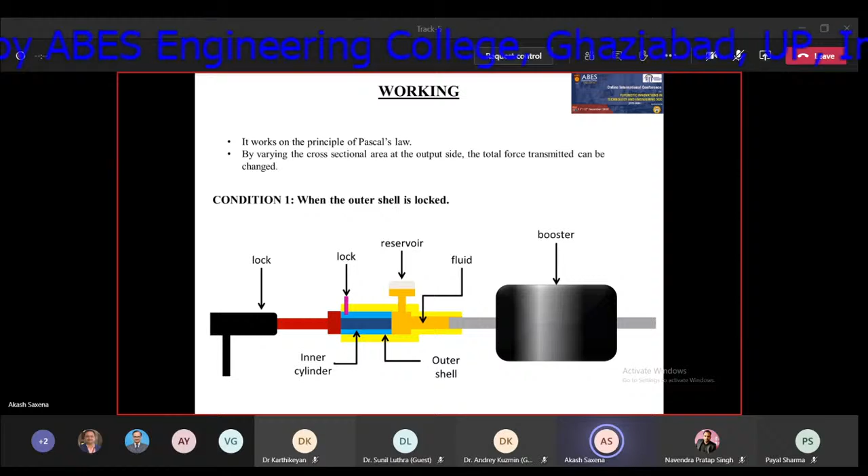Now, there are two scenarios which offer different ratios of the multiplier. Here, the multipliers that we have chosen are 1 and 3. Let's assume the driver has pressed the button for 1. In this case, the outer shell is locked.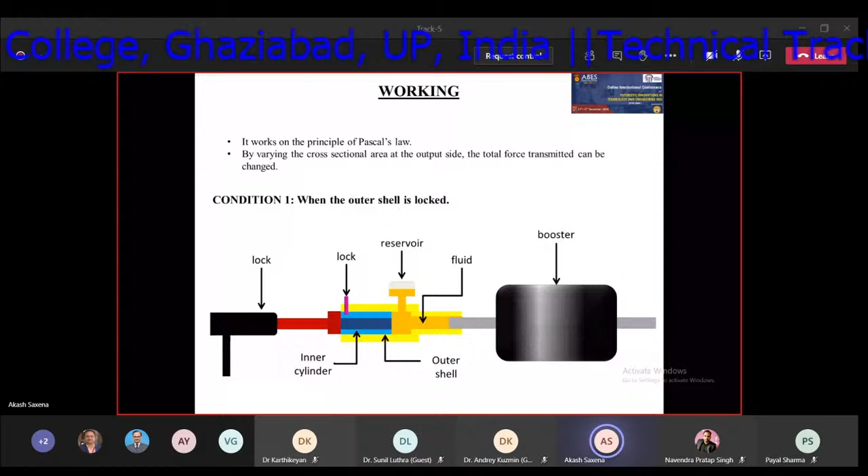When you press the pedal, it applies force on the inlet of the booster, and the outlet shaft of the booster moves outward. This movement provides the plunging action, and the inner cylinder moves outward. Since only the inner cylinder moves outward, the brake force is transferred as it is, and then the brake is applied. As you can see here in this animation, you will get the basic idea.

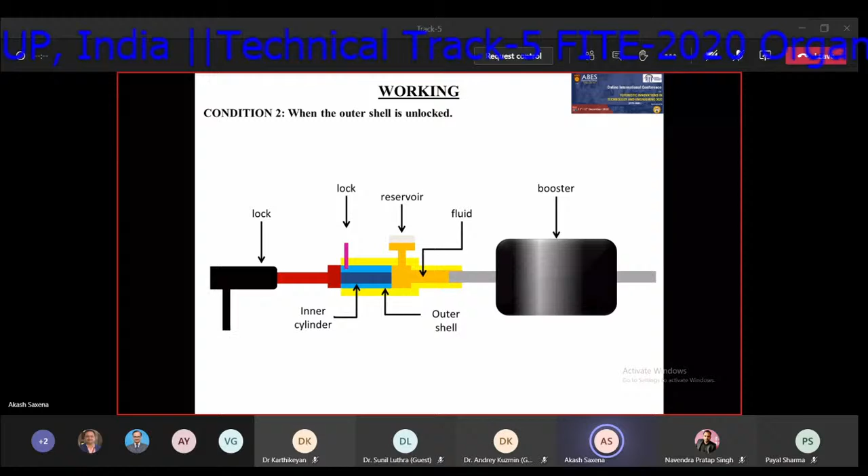Now, let's talk about when the outer shell is unlocked and the multiplier chosen is 3. When the driver chooses multiplier 3, the outer shell is unlocked. When the pedal is pressed now, both the outer shell and the inner cylinder move like a larger solid cylinder. The area at the outlet becomes 3 times that of the inner cylinder, and thus thrice the force is transferred to the master cylinder.

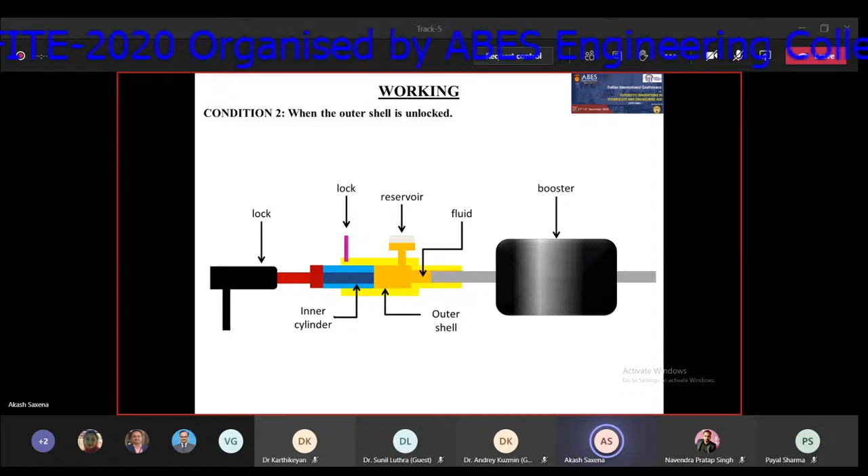As you can see here, the lock is open, and now when the plunging action takes place, both of them move simultaneously. Now, let's talk about the methodology, the design constraints, and how we actually designed this force multiplier.

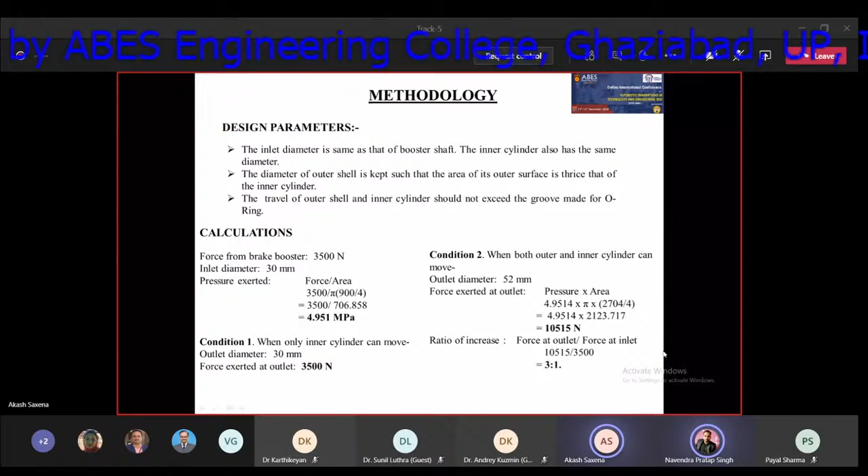Akash, please take over. Hello, Akash. Akash, can you hear me? If he is not able to respond, you can go ahead. You can continue. All right, then I will continue.

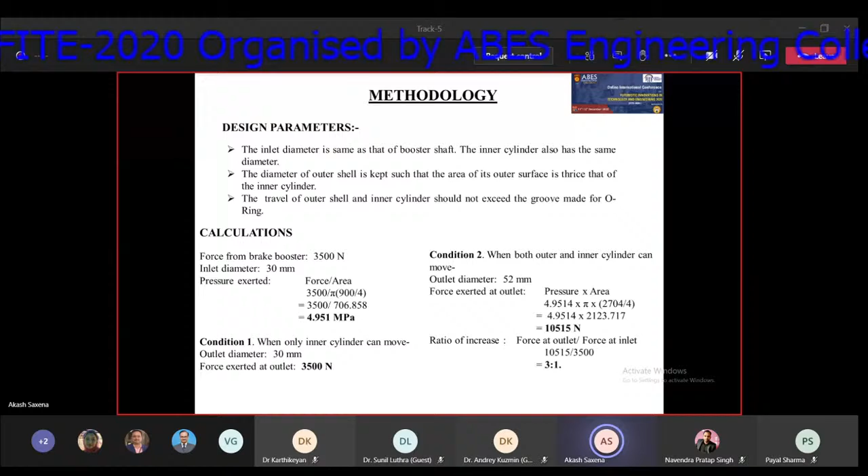We first began with the idea of providing different force at the outlet for the same inlet force to design this force multiplier. So we came up with a concentric cylinder arrangement. The booster shaft had to provide the plunging action, so the inlet diameter was the same as that of the shaft. Now, for the force multiplier 1, the area at outlet and inlet both had to be the same, so the diameter of the inner cylinder was also kept the same.

For force multiplier 3, the force at outlet needed to be thrice, so the radius was calculated using this relation. Then the other parameters were decided, like where the O-rings should be placed and how much space we should give to the fluids, etc. And now, as you can see in this calculation shown here, the force from the booster was taken to be 3500 Newton.

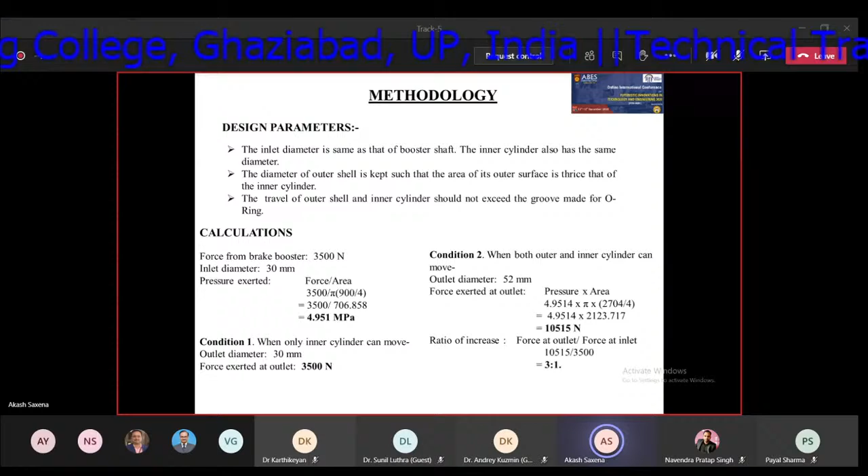It varies from 3000 to 3500, so we have taken the maximum. The diameter of the shaft was kept at 30 millimeter. The pressure exerted is force upon area, which came out to be 4.951 megapascals.

Now, there are two conditions, as I stated before. For the first condition, when only the inner cylinder can move, the outlet diameter was kept at 30 mm, the diameter of the inner cylinder. So the force exerted was the same, 3500 Newton.

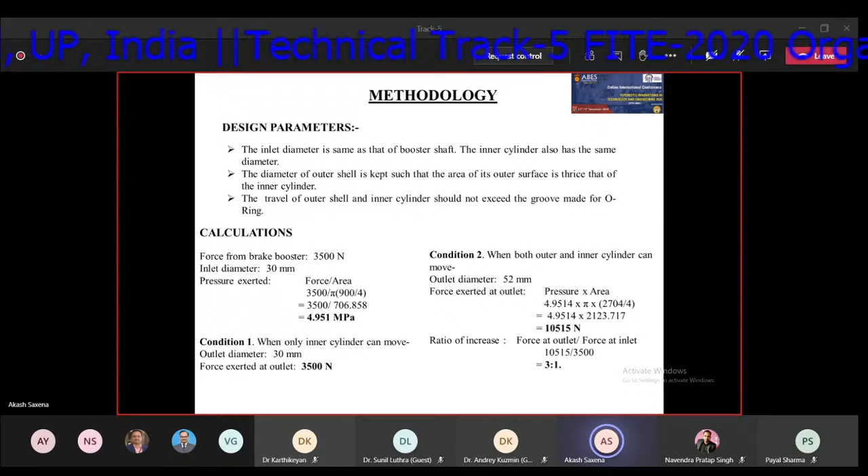In condition 2, when both the outer and inner cylinder can move, the outlet diameter was kept at 52 mm, and the force exerted at outlet is pressure into area, that is 10,515 Newton. We calculated the ratio, which is approximately 3:1. It is 3.004, so we rounded it off.

Now, about the analysis. Okay, Akash, I guess you're back. Yes, I'm really sorry about the internet issue, but I'm back now.

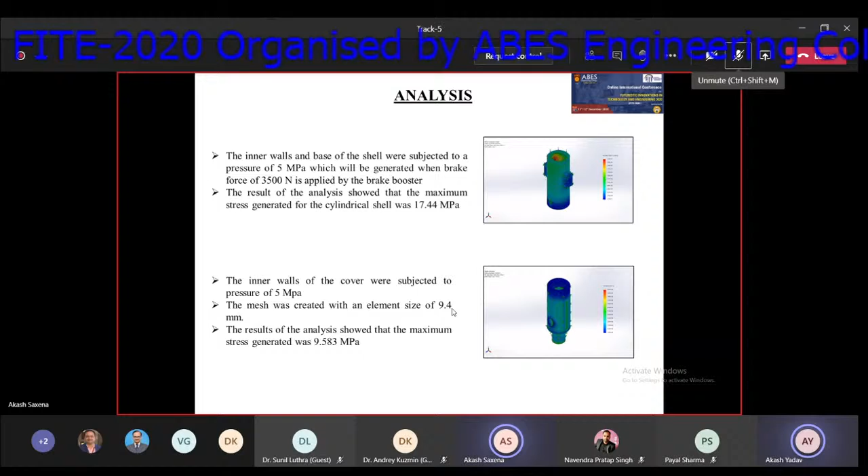Go ahead, please. So after the design was completed, we did the structural analysis of the parts, namely the outer shell and the cover. The inner wall and the base of the shell was subjected to a pressure of 5 megapascal, which will be generated when brake force of 3,500 Newton is applied by the brake booster. The result of the analysis showed the maximum stress generated for the cylindrical shell was 17.44 megapascal.

And for the inner walls of the cover, they were subjected to a pressure of 5 megapascal, and the result of the analysis showed the maximum stress generated was 9.583 megapascal.

So now we have seen that the force multiplier provides two values of force for the same input force. This results in two rates of braking. Now I'd like to talk about why we need two different rates of braking.

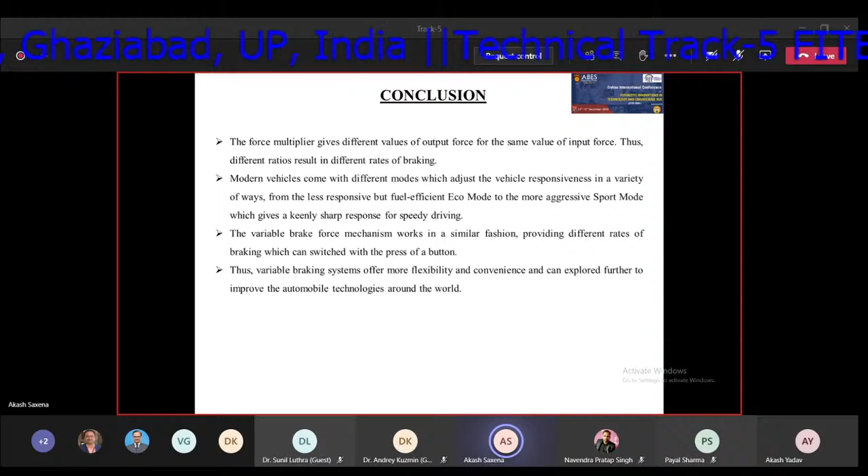Different terrains require different rates of braking. On a slope or a muddy terrain, it is better to have a higher rate of braking. For a highway, the usual rate of braking is sufficient.

If you talk about modern vehicles, they come up with different modes which adjust the vehicle responsiveness in a variety of ways, from less responsive but fuel efficient eco mode to the more aggressive sport mode, which gives you a keenly sharp response of speedy driving.

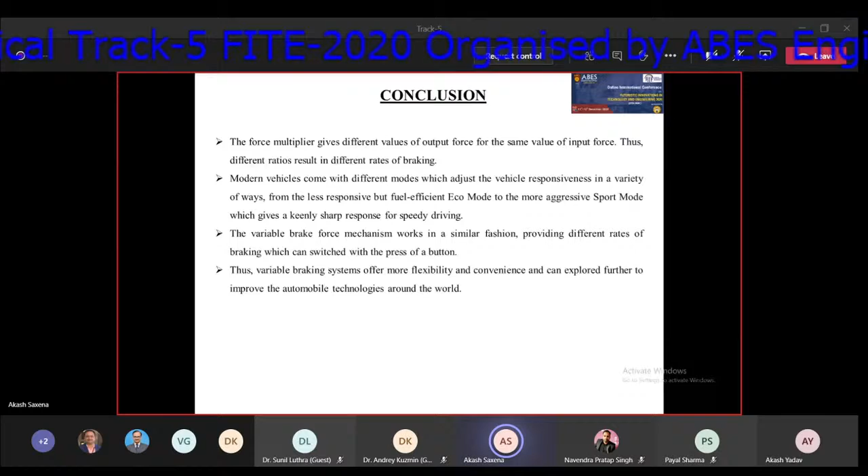But the changes that sport mode or eco mode bring are limited to transmission. With the introduction of the variable braking mechanism, when we change modes, it brings about a more comprehensive change in the vehicle. Thus, the variable braking systems offer more flexibility and convenience, and I think they can be explored further to improve automobile technologies.